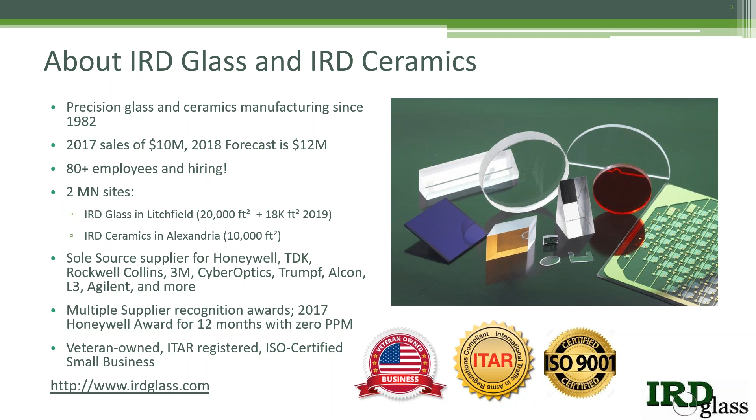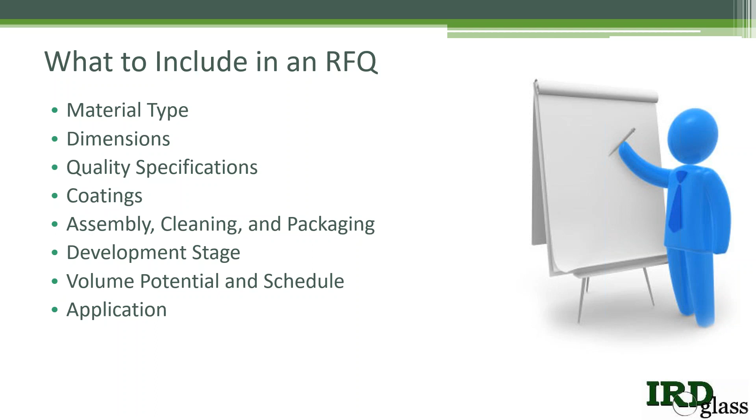What material is your part going to be made from? Customers usually have a material type chosen already, but full service providers like IRD Glass can help you make a material choice or advise a lower cost or lead time alternative. Material choice is typically driven by a balance of physical properties, cost, and availability. The most common properties for optical applications are optical transmission and index of refraction.

But many applications require materials with added strength or hardness, such as for cover windows. The ability to withstand high temperatures or large temperature changes, such as space applications, or various chemical and environmental conditions, such as oil field applications, and some dielectric insulator applications. Knowing why you've chosen a material can help us recommend alternatives or make sure we supply the appropriate material grade.

Customers often do not specify the quality grades of their choice material, which can be a problem. For optical transmission applications, this information can be crucial. For example, the very common material fused silica is available in a variety of grades that significantly affect price, optical performance, and overall application performance. Materials are made in a variety of methods, including drawn glass, block glass, or grown crystals.

Available sizes may be smaller than needed, or extra processing required if the preferred format is not available. Yields may be an issue. Many custom fabricators keep a stock of the most common glass types and sizes. For materials needing to be ordered from glass melters, lead times could be long and they rarely expedite. Some glasses are only made once every few years, which may mean very limited availability or limited sizes.

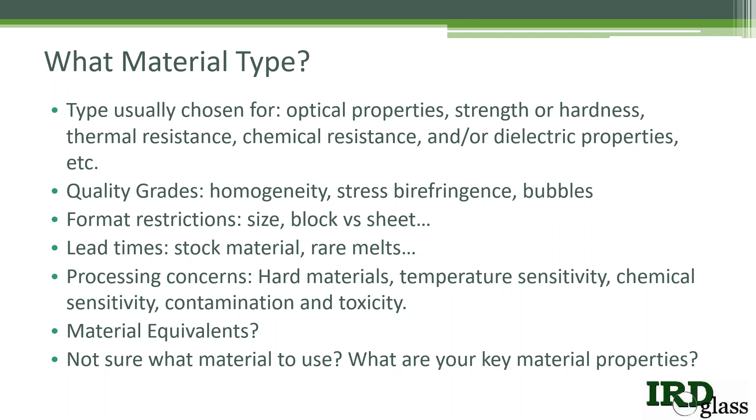In summary, it's good to keep an open mind about material type. Different materials affect pricing in a variety of ways. If it's a new product, provide as much information as you can about why you've chosen the material you have. There's a good possibility that there could be a more cost-effective or quicker material that will do exactly what you need.

Here's a list of some of the common materials used for custom flat optics and technical components, from the cheapest commercial grade soda lime glass used in everyday windows to the highest purity fused silica. These materials are made in a variety of formats and sizes. For example, Borofloat is a high quality float glass. Although not quite optical grade compared to N-BK7, it is a suitable material alternative in many optical window applications. Because it's a floated glass, it can be significantly cheaper than N-BK7 by minimizing or eliminating the need for lap

and polish processing. Filter glass is generally provided from glass makers as unfinished 6-inch square sheets. Considering the format, 2-inch rounds aren't going to be the most cost-effective size for yield in this material, especially in smaller volumes. Crystalline materials such as sapphire and silicon are grown to size, and therefore much more expensive in larger sizes. For window applications using sapphire, you may be better off with multiple small windows rather than one big window.

For very thin glass applications, less than a millimeter thick, extra processing is often avoided by using high-quality drawn glass or overflow fusion glass. Glasses are made in specific thicknesses, so the design flexibility to use the standard thickness is often a much better solution for cost and availability.

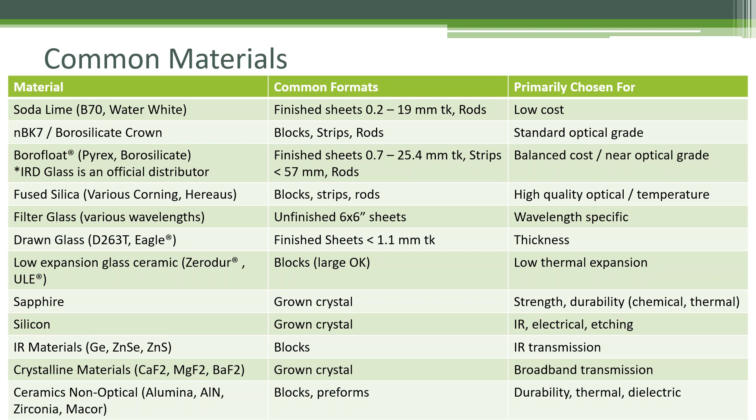Now that we know what material we're using, we need to know the size and shape. Drawings are the best way to convey this information, even for simple windows. When information is provided as a text list, there is inevitably missing information or confusion. PDFs are great for sales teams for initial review and consultation, although SolidWorks and other drawing files are good for more complex parts when discussing with engineering.

Length, width, and height are obvious, but don't forget to add tolerances. If a dimension isn't important or is flexible, let your fabricator know. There are a lot of behind-the-scenes cost factors that they can take into account to make a recommendation for you. Parallelism, angular tolerances, and radius of curvature will be important depending on the part. Bevels and/or edge chip specifications are a must.

The edges of parts always have chipping, depending on what magnification you use to view them. Even a laser-cut edge has microchipping. It's important to let us know what is acceptable. No chips is pretty much impossible or is going to cost you a lot more than you bargained for. A typical cost-effective chip spec, depending on part size, is less than half a millimeter, or can be substituted by a bevel edge spec. If a bevel edge is for safety only, let us know the maximum size. There's no need to overspecify and add cost.

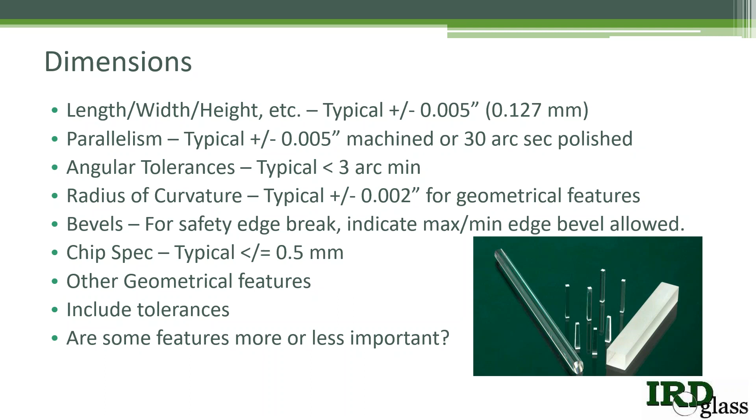Tolerancing and specifications can get creative to optimize manufacturability and minimize cost. For example, we've had hexagons where the sum distance between sides was more important than the individual sides, so we made the spec accordingly. Maybe for your application, chips only need to be minimized along one edge. Or maybe it's only the quantity of chips that's of concern rather than the actual size. These creative specifications can help reduce cost by increasing yields.

When it comes to surface quality, things start going awry near the edges of a part. There's chipping, roll-off, coating fixture shadows, etc. It's best to define a clear aperture, which is the area where surface quality specifications apply. A typical clear aperture of 80 to 85% is the most cost-effective, with larger clear apertures adding cost.

If the application allows, clear aperture and chip or bevel specifications can be combined. Let your fabricator know which surfaces are important and which can be left to best manufacturing processes.

Many applications require flatness control of one or multiple surfaces. For transmission optics, usually the wavefront error is the primary concern, and that's controlled by the flatness of multiple surfaces, the parallelism between them, and the material. It's important to let us know if the part will be used as a transmission optic or reflective optic, or as a non-optical component to better understand the tolerances and specifications.

When specifying flatness, it's usually designated as waves using a 632 nanometer reference wavelength. Different wavelengths can be used for testing, so it's important to designate the reference wavelength for your specification. Sometimes flatness is called out in microns instead. For high precision parallelism and flatness, double-side polishing is the preferred manufacturing method. Double-side polishing is a high-volume process, so low-volume runs will not be as cost-effective.

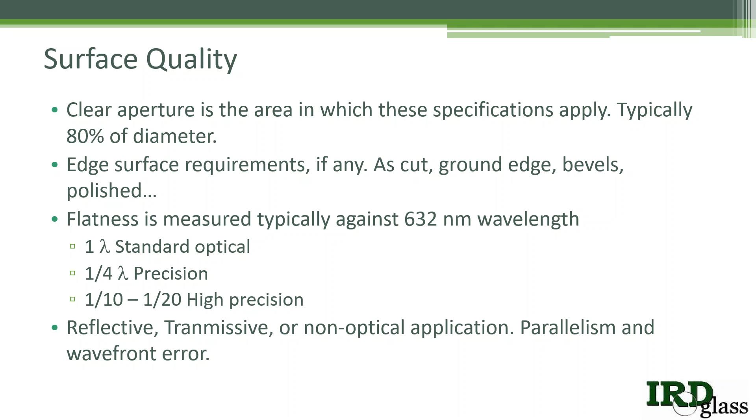Surface roughness is often not a required specification. Specifying scratch dig quality usually yields a suitable surface roughness for most applications. There are some applications, however, such as high-power lasers or precision mirrors, where surface roughness is important and should be specified.

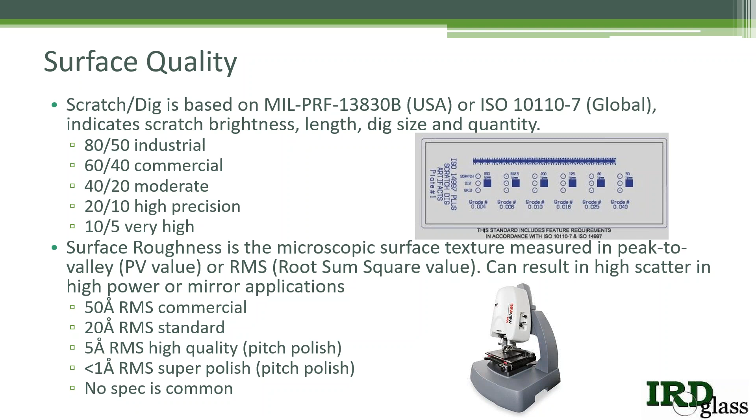Many optics require additional optical coatings, which have their own set of specifications apart from the uncoated substrate. For example, if a coated part has a 60/40 scratch dig, the uncoated substrate usually needs to be a grade better, or a 40/20 scratch dig in this case, in order to meet final coating spec. As a full-service manufacturer, we at IRD Glass can take a complete coated spec to determine the uncoated specification. But this difference is important to consider if you'll be purchasing uncoated optics to have coated elsewhere.

For optical coatings, be sure to indicate the relevant wavelength range of use, as well as the transmission or reflection maximum or minimum and average. It's also better to be safe than sorry and specify the angle of incidence, especially if it's not just 0 degrees. For filters, specify the cut-on and cut-off transmission profile and tolerances. If you don't have a specification, indicate what you're trying to do to make sure that the coating meets your real requirements. For anything other than the most standard light sources, you should indicate them in your request to make sure that the coating can function properly.

Custom coating designs can be made more or less durable, affecting cost. Be sure to include your durability or environmental requirements. Again, if you don't know what spec to use, let your coater know how the part will be used. Clear aperture applies to coatings as well. If your coating is a pattern, be sure to indicate a location tolerance for the pattern or indicate if location is not important.

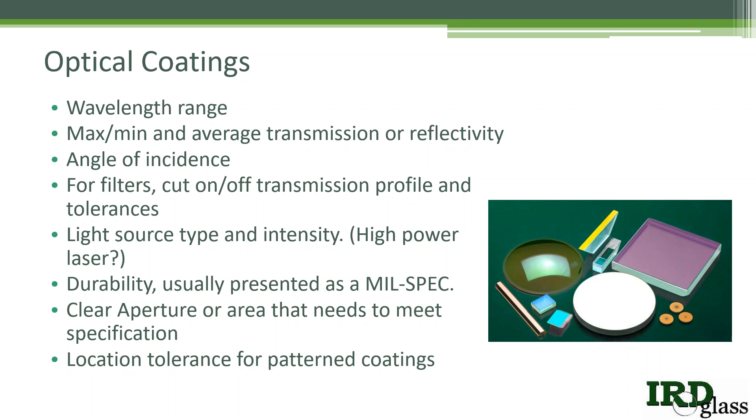For parts requiring assembly, it's good to know how the parts will be used. IRD Glass uses a variety of UV cure epoxies and other glues. The optimal glue depends on chemical, thermal, and optical requirements and environmental conditions. For example, glues are not suitable for ultrasonic cleaning.

Your custom fabricator will have a variety of ways to clean and package your parts and will generally quote the most cost-effective one. Packing options include paper interleaves, reusable cleanroom containers, gel packs, pill holders, and more. Cleaning options include basic residue removal, thorough hand cleaning, and ultrasonic cleaning.

Consider how the parts will be used once you receive them. Although particular cleaning and packaging options may be more expensive on the quote, they could save you a lot of time and money on your factory floor by eliminating handling steps. For long-running projects, also consider the environmental and cost savings of reusable or custom-designed packaging.

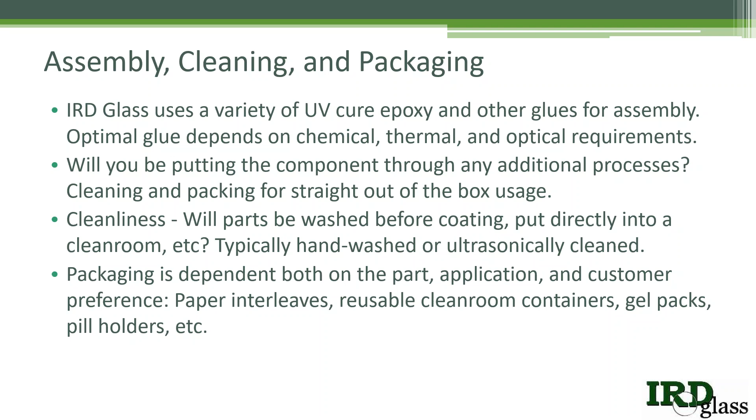Knowing the development stage of your request can help tailor a quote to your needs. For one-time orders that aren't prototypes, it's best to use an off-the-shelf or catalog part from companies such as Thorlabs and Edmund Optics. If that's not possible, considerable cost savings and faster delivery can be achieved by customizing off-the-shelf products if there's something close to what you need. Avoid specifications that require large batch processes or are difficult to produce. Be open to design modifications to reduce development and small lot costs to reduce no bids.

Are you designing a new product and need a small volume prototype? We always recommend customers contact us as early in the design process as possible to help design with manufacturability in mind. Let your fabricator know you're still in the design stages. The benefit of using a full-service fabricator like IRD Glass is that our engineers work directly with customers to determine critical function points in the design, cost drivers, and where cost-reducing modifications can be made with minimal performance loss. A quote for a simplified prototype design that tests what you need to test could be a good option before a full-featured product.

If you're looking for a new vendor of an existing product, let your fabricator know. Everyone has a standard for lead time, price, and quality, but priorities can be adjusted based on customer preference. If your fabricator knows lead time is number one, they can quote some expedited options that might better fit your needs. It's helpful to know what you like and don't like about your existing suppliers so that targeted care can be made. For example, if it's a quality issue, customized quality control or modified processing steps can be incorporated into the quote.

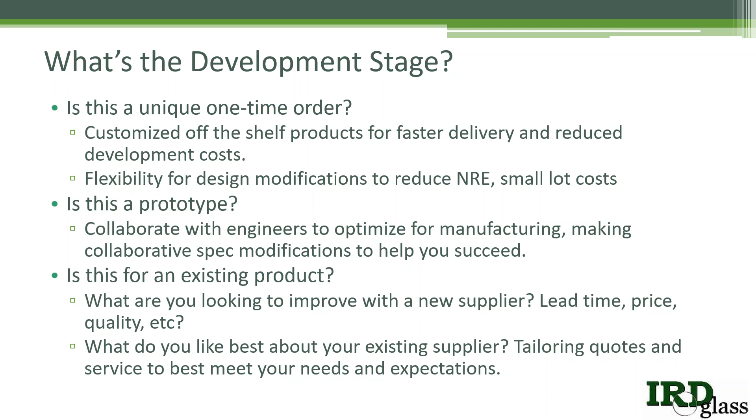What's the volume potential and ramp schedule? You'd be surprised at the broad range of standard lead times various glass fabricators offer. Get a quote that meets your expectations by providing your own lead time preference and its priority. Oftentimes, small volume production costs have no relationship to larger volumes. Some fabricators can provide a lower cost prototype, but are uncompetitive at larger volumes. Since prototypes are the first stage of production success, it's best to work with someone who can do both.

Be sure to RFQ additional volumes to make sure your supplier or product design can meet future volume and cost expectations. There may be additional process development needed to optimize volume manufacturing. Knowing long-term volume production and ramp schedule can help steer your fabricator into process decisions for quote, including custom tooling and fixturing and capital equipment suitable for your growth. At IRD Glass, we're always looking to where our customers need to be over the next 5 years. Your fabricator may not be able to do what you need to do today, but outlooking RFQs can help guide fabricator internal development so that they may have a solution for you in the future.

Be aware of specifications that require volume-dominated process costs, especially when making small volume requests. These include double-side versus single-side polishing, coating, complicated tooling, setup, or process, or multi-step productions with different run sizes.

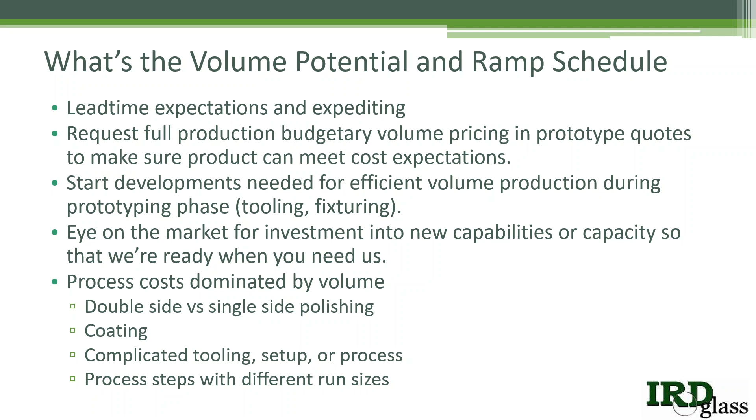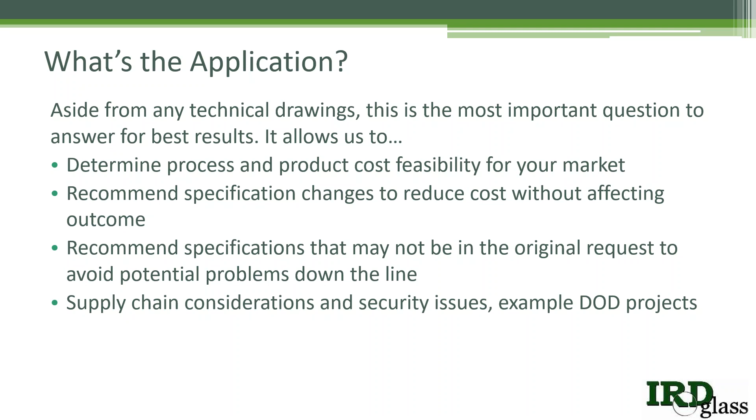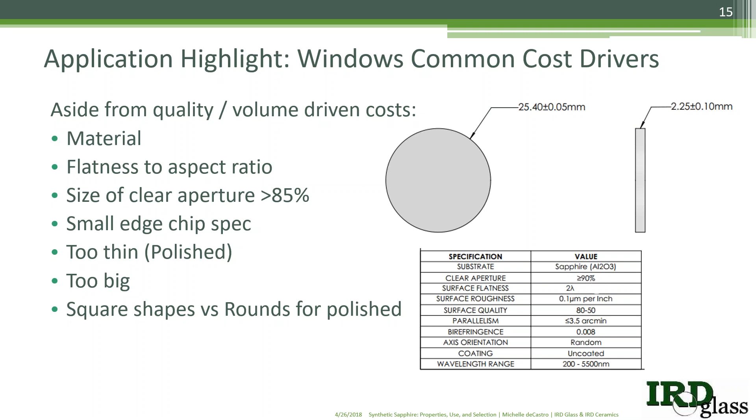So you might say, wow, that's a lot of stuff to include in one RFQ. But like any good relationship, communication is key. The more your fabricator knows about your priorities and goals, the better tailored the quote will be, and the better your chances at a satisfactory purchase. And remember, you're not alone. With over 30 years of experience, we've done a lot of common, unique, amazing, easy, and difficult projects. We've learned a lot along the way, so we can help you make wise decisions where there's uncertainty. Together, we can make your project a success.